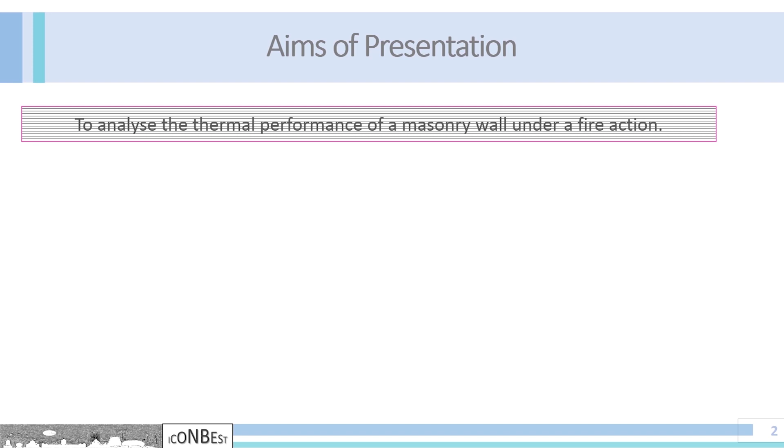Within this framework, the present investigation aims to analyze the thermal defensiveness of hollow clay brick masonry walls subjected to fire action, or exposed to elevated temperatures. The main objective of this study is to analyze the thermal performance of a masonry wall under a fire action that corresponds to the eminent standard temperature-time curve of fire as specified in the European standard, Eurocode 1. Temperature variations on the non-exposed surface of assumed masonry walls, revealing their thermal responsivity and self-defensiveness, can be determined by adapting a 3D model and an eminent dynamic thermal simulation program.

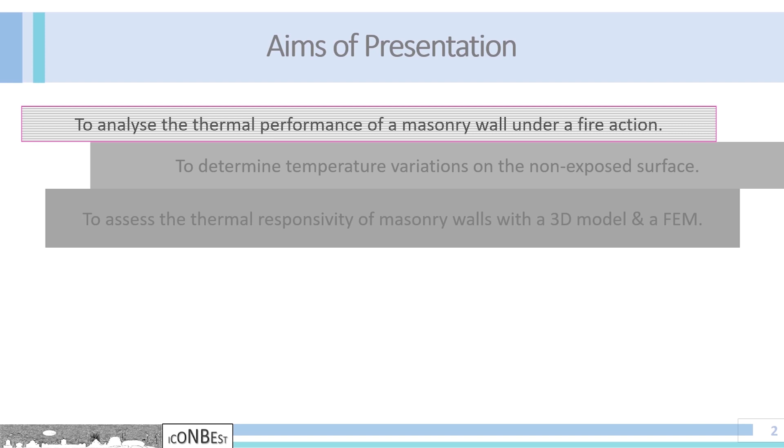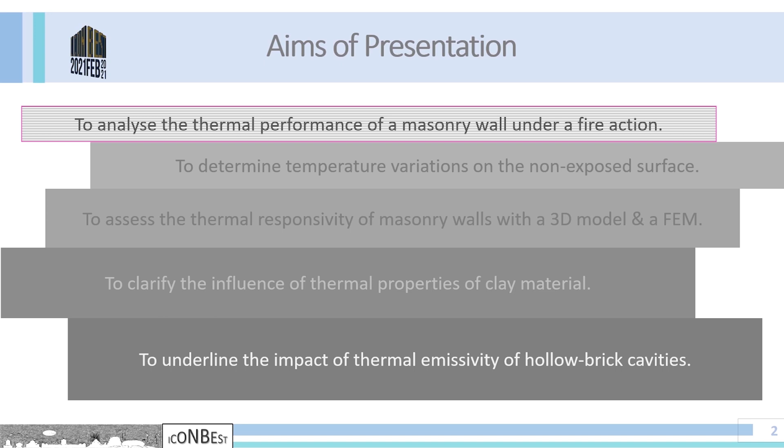This work shows the significance of the thermophysical properties of clay material and the importance of thermal emissivity as regards heat transfer processes for examined assemblies. Apart from this, a few slides regarding the thermal behavior of insulated wall configurations are exposed to highlight the influential role of the insulation layer on the heat flux and the corresponding temperature variation in the time domain.

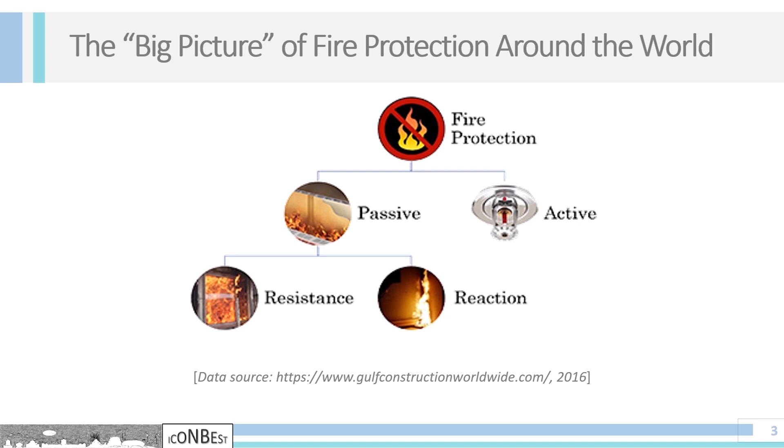It is essential to point out that fire protection shows an immense interest on a global scale. Severe consequences of fire incidents and accidents address the demand to enhance the design of building shells. In order to mitigate this impact, passive as well as active measures demonstrate an efficient way to fulfill this critical demand. Regarding passive approaches, the resistance and reaction of building materials, building elements and building structures underline some of the key issues of this problem. To address these points, mostly national fire regulations specify prescriptive necessities based on the shown experience.

Passive fire protection concerns fire and smoke prevention measures, such as the design of the building and the compilation of structure elements on the basis of building materials arrangement. On the other hand, active fire protection focuses on fire and smoke control measures. These are fire and smoke detection systems, fire suppression systems, portable automatic fire extinguishers, and at last, smoke extraction systems that are regulated by naturally or forced control ventilation schemes.

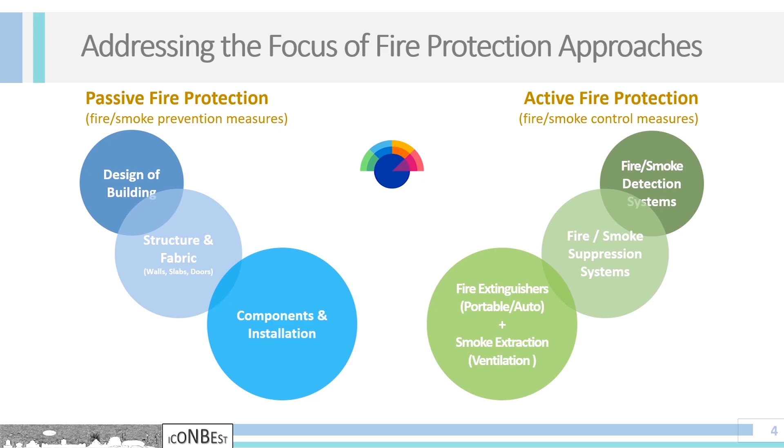With respect to smoke extraction systems, it is essential to point out that they can ameliorate sharply the performance-based design of buildings and facilitate the evacuation process. Since the core attention of this investigation refers to passive fire protection of buildings, it is important to state that the installation of building components is critical.

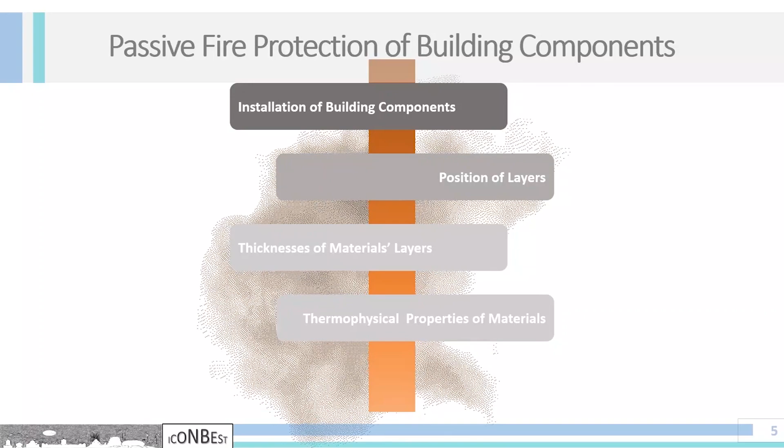Accordingly, the position of building layers, in addition to the geometrical characteristics and thermophysical properties of building materials, can modify and shift substantially heat fluxes and temperature fluctuations. This implies also the exposed temperature peaks, which is a central issue of this presentation.

In the literature, someone can notice that the thermal response of masonry walls strongly relies on the assembly of involved materials. Moreover, in many studies, the thermal properties of clay material are shown to be influential in terms of heat flow through the masonry. In other papers, the importance of air cavities within clay hollow bricks is clarified with respect to the thermal emissivity of involved surfaces. So, as seen, a special consideration is given to thermal processes through masonry walls.

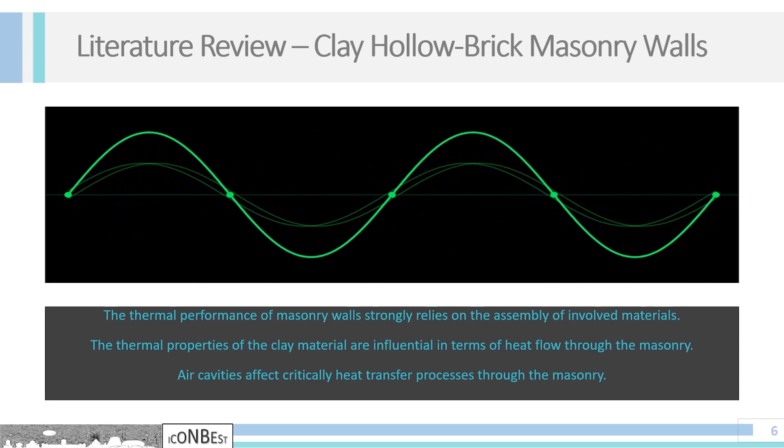This persistent dedication makes obvious the stress of this study in order to further clarify the gray zones that still remain. Moving forward, masonry walls and building materials are illustrated in the following slides.

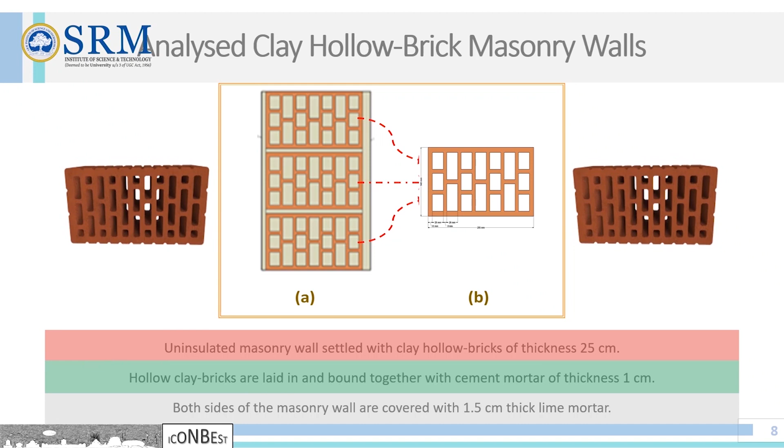As can be seen here, the analyzed building assemblies correspond to uninsulated masonry walls. A masonry wall consists of conventional hollow clay bricks which are laid in and bound together with cement mortar. The thickness of each clay brick unit of a masonry wall is 25 cm, while the thickness of the bond between bricks and mortar is considered to be 1 cm. In addition, both sides of a brick wall are covered with 1.5 cm thick lime mortar.

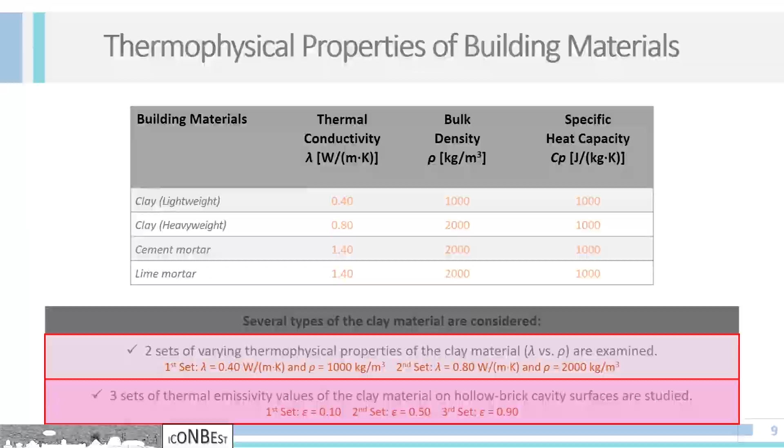The thermophysical properties of the clay material of brick units, of the brick bonding, and of both coatings are listed in the current table. Furthermore, with reference to hollow blocks, two different types of clay material are examined, referring to lightweight and heavyweight categories. Then again, three sets of thermal emissivity values of the clay material on hollow brick cavity surfaces are considered for the aims of this examination. These values cover, from one side to another, the entire possible range of emissivity variations in the production stage of building materials.

Consequently, the analyzed masonry wall scenarios are briefly stated in this table. As seen, six illustrative cases are analyzed. Based on these choices, our main goal is to extract findings that can clarify the general trends shown in analogous cases.

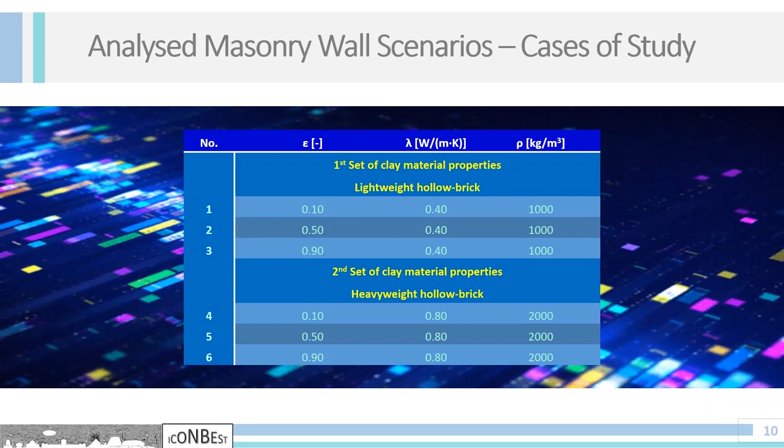As we move forward, the environmental conditions on both sides of the masonry wall should be cautiously selected and specified in order to conduct the transient thermal analysis. With respect to temperature variations on the exposed to the fire boundary, a logarithmic forcing function appears to be valid. This type of variation demonstrates the actual elevation of temperatures due to a fire action incident.

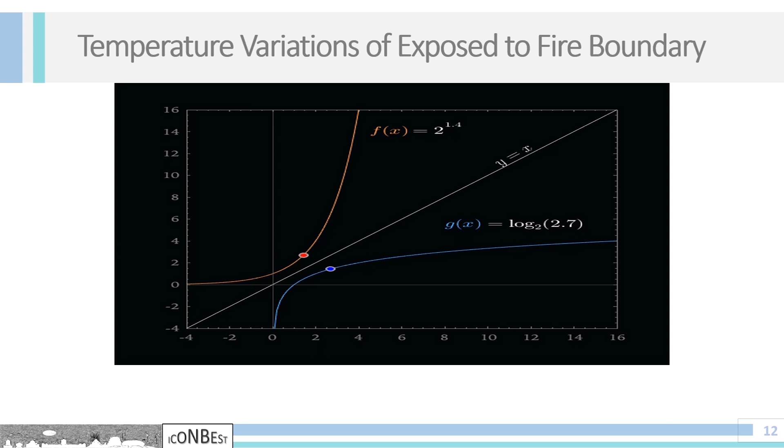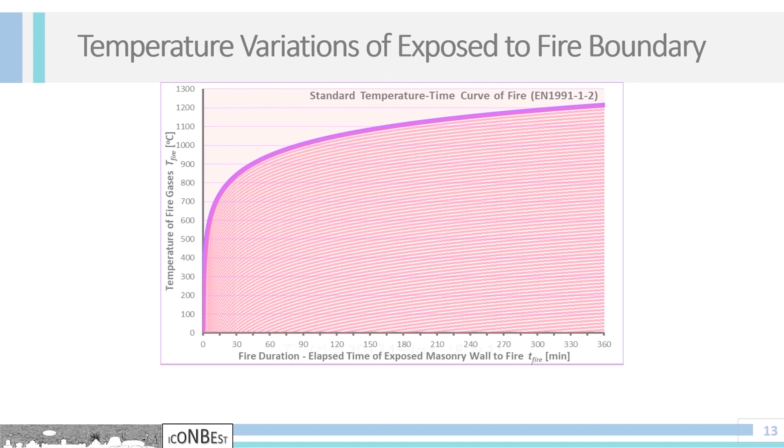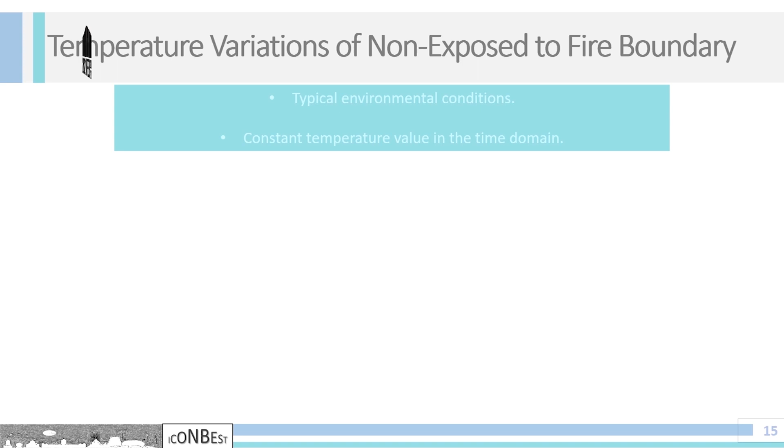Gas temperatures in the vicinity of a fire-exposed masonry wall can be replicated by adapting nominal temperature time curves according to Eurocode 1. This trend is elucidated by the standard temperature time curve of fire, with temperature variations aligned with the following equation. On the other hand, temperature values on the unexposed surface of a masonry wall against the fire action show a fixed trend, expressed by a constant air temperature value for the entire 6 hour period of the conducted transient thermal analysis.

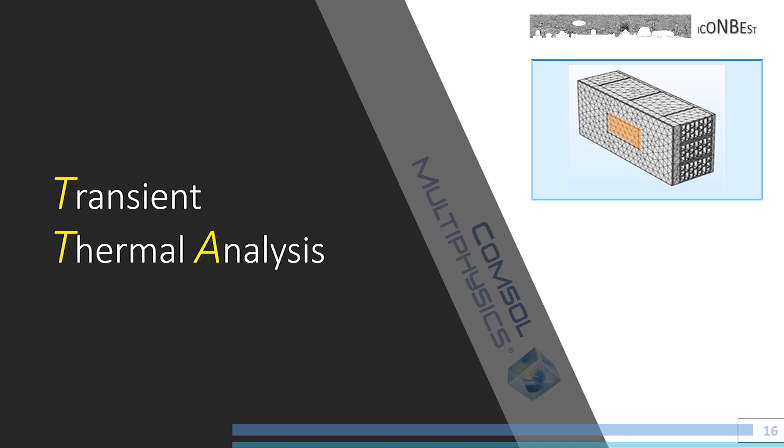At this stage, our main concern is to briefly illuminate the key aspects of the transient thermal analysis. This part addresses the simulation program as well as the model development for the fundamental objectives of this work. To accomplish this goal, a finite element methodology reflecting the main philosophy of the algorithm was taken into account. In this context, three-dimensional modeling is considered an adequate technique, as actual transverse heat flows are assessed due to their vital impact on the findings of this numerical work.

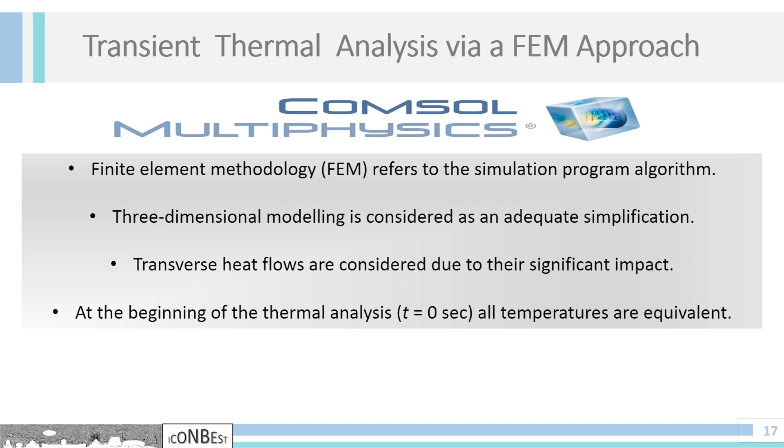To resolve heat transfer processes for building members, it is necessary to specify the geometry of its structure, the thermal and spectral properties of entailed building materials, and the forcing functions on both boundaries. The following equations demonstrate the theoretical background of this analysis. Overall, these equations account for conduction through solid wall sections of the assembly, free convection within air cavities developed by the brick hollows, long wave radiation on the cavity surface of brick elements, and finally convection and radiation on both boundaries, while assuming some basic simplifications that do not disturb the reliability and accuracy of the heat flow evolution.

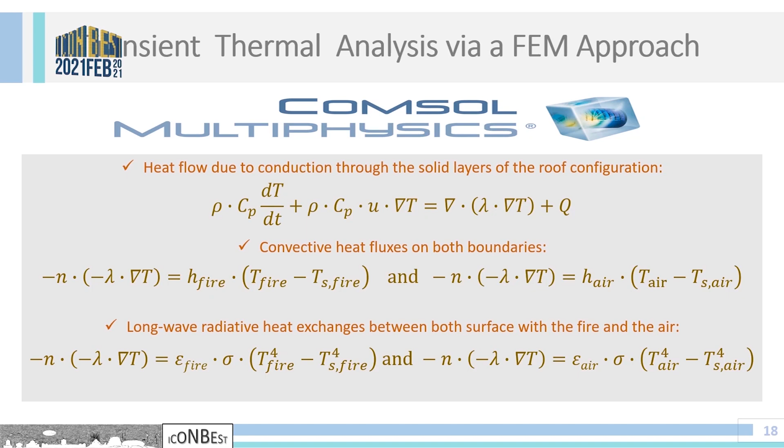As we proceed to the core sections of this study, simulation software findings showing the impact of the previously mentioned parameters on the temperature evolution of masonry walls subjected to fire are given in the following parts of this presentation. As already mentioned, special focus is given to the indicated temperatures on the unexposed surface of the clay hollow brick masonry walls.

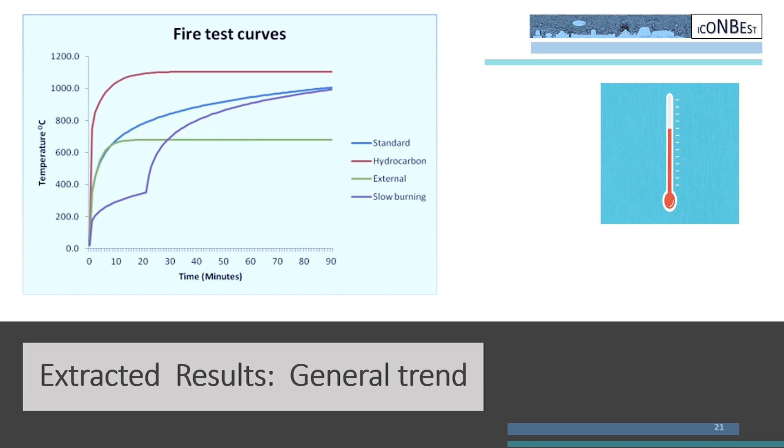In general terms, the extracted results of this effort in the time domain unveil a gradual increase of the developed temperatures. This is a rational outcome since the fire action presents an elevated logarithmic trend. Therefore, based on this forcing function, someone could say the only way for the shown temperatures is upwards.

As shown in this graph, an increase of the thermal emissivity leads to a parallel increase of the resultant temperature of the non-exposed surface. For lightweight masonry walls subjected to fire, the maximum surface temperatures are as follows: for an emissivity equal to 0.1, the maximum temperature reaches 185 degrees; for an emissivity equal to 0.5, the maximum temperature is 220 degrees; while for an emissivity of 0.9, the temperature is 235 degrees. It is worth noting that as the value of thermal emissivity rises, its effect on the temperature values weakens. Moreover, the rate of temperature increase declines as it asymptotically approaches a constant value.

From the graphs in this slide, it can be observed that variations in clay material properties affect the thermal response of heavyweight masonry walls in a similar fashion. For this case, the corresponding temperature values of the non-exposed surface are as follows: for an emissivity of 0.1, a maximum temperature of 180 degrees; for an emissivity of 0.5, 240 degrees; and finally for an emissivity of 0.9, a maximum temperature approximately equal to 265 degrees.

It becomes apparent that the thermal behavior of a masonry wall sharply relies on the thermal emissivity of the clay material. This implies that the thermal effectiveness of low emissivity coatings is essential with respect to moderated heat fluxes through the geometry of the masonry wall. Therefore, brick units integrated with low-E coatings are less prone to the engaged fire exposure.

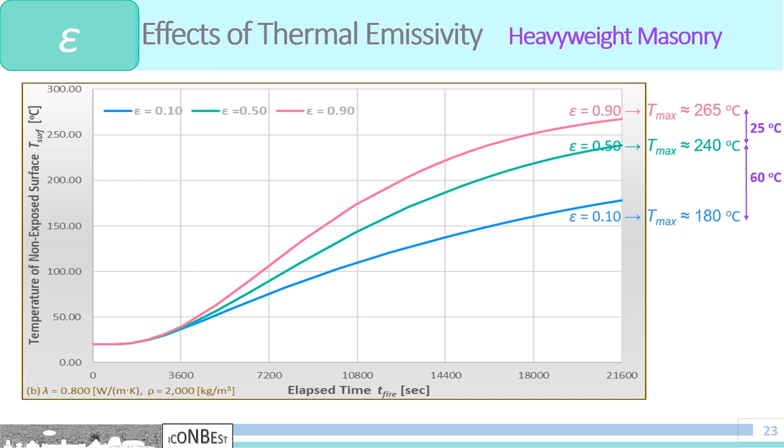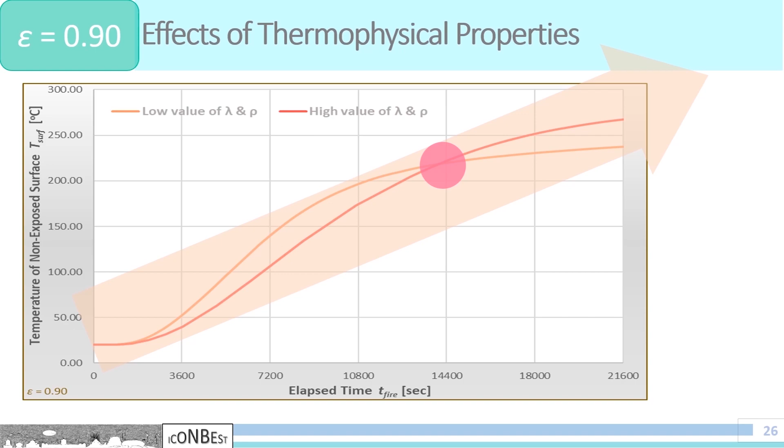However, there are several additional aspects that can tremendously modify heat transfer processes through masonry walls and building layouts. Such principal issues capable of radically revising the previous shown trends are the presence of a thermal insulation layer, the flammability of the insulation subjected to elevated temperatures, and the position and allocation of the insulation with respect to the masonry outline. Based on these points, the insulation layer can support or not the self-defensiveness of building components exposed to a fire action.

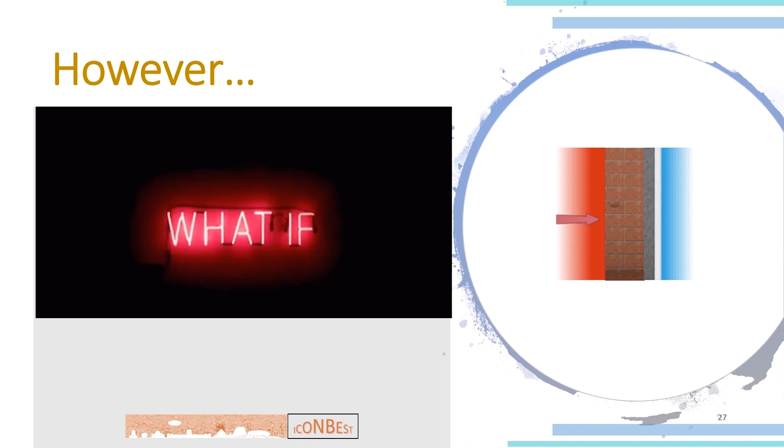Yet, this is another long story that I may have the pleasure to present on another occasion. As seen to the right side of the slide, a general outline of the examined insulated masonry wall is delineated, along with the discretization of this component using the mentioned simulation tool. Evidently, the procedure appears similar to that presented previously, while an additional layer is incorporated to assess the effect of the insulation layer.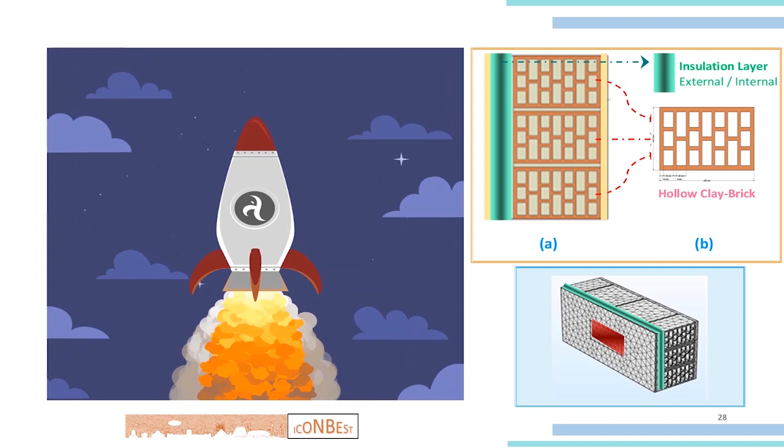To be more precise, the flammable material is stable until approximately 100 degrees, but after that enters a glass transition phase, and above 110 degrees undergoes rapid thermal degradation. The inflated EPS beads lose their volume and at 150 degrees regain their initial diameter. At 160 degrees, the EPS appears to be in a viscous liquid state and can no longer be categorized as a solid insulating board.

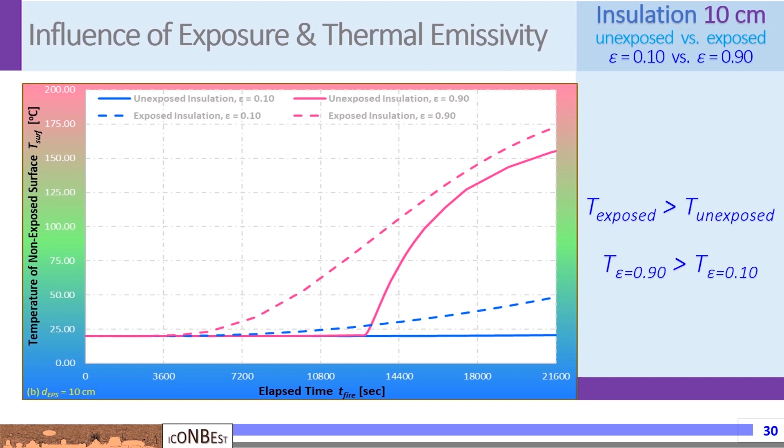Moreover, in this slide, one can notice that increasing the thickness of the thermal insulation layer from 5 to 10 centimeters does not notably affect the trend of the presented temperature variations at the backside of the wall. Consequently, the melting process stage of the insulation layer leads to only a minor delay of the shown temperature fluctuations. Nevertheless, the influence of the thickness of the thermal insulation layer will be prominent for a non-flammable material such as a common rock wool layer.

To conclude, the selection of materials' thermal properties plays a significant role regarding the temperature evolution through building components. Neglecting these aspects may cause severe consequences and repercussions in terms of fire behavior. The effect of thermal emissivity is vital and accounts for the majority of present masonry configurations. High emissivity results in an important heat bridge that accelerates the heat wave progress towards the unexposed side. On the other hand, decreasing the emissivity will introduce a secondary heat resistance within the brick unit. Finally, rising gas temperature values rely on the density of the clay material.

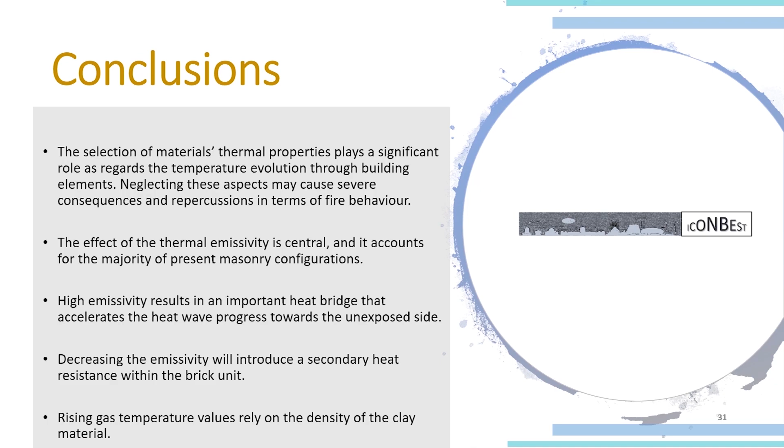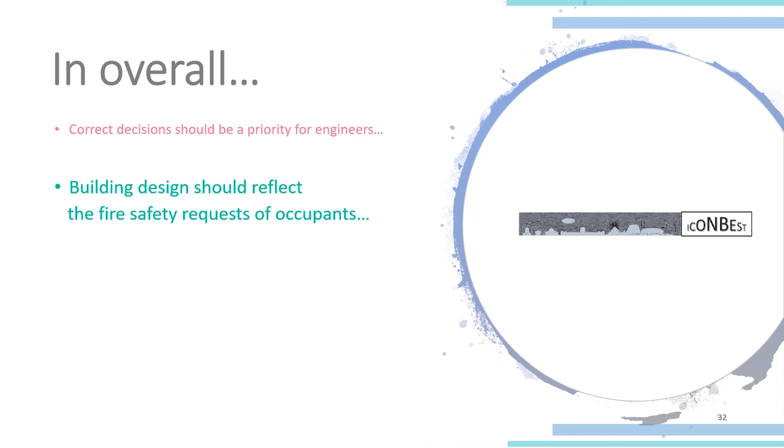So, as is clear, correct decisions should be a priority for engineers. Moreover, building design should reflect the fire safety requests of occupants, and finally, our dedication to fire protection decisively affects the fire safety needs. This aspect depends vigorously on the understanding of the basic principles of nature's processes.

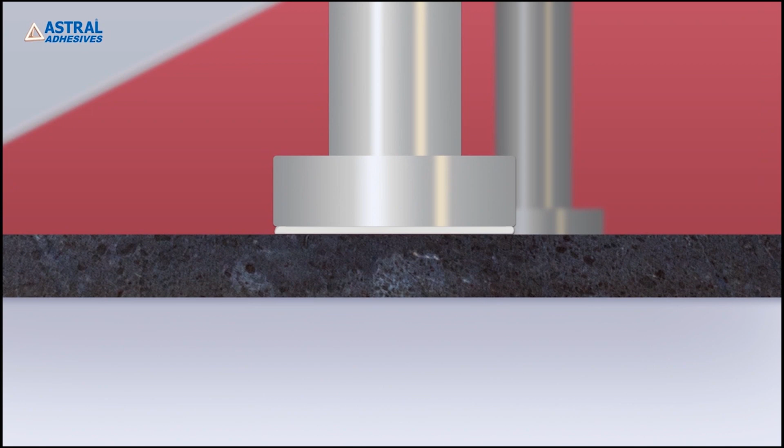Epoxy adhesives are widely used in the industry because of their high strength, chemical resistance, and the ability to adhere to different surfaces. But almost all of them have low impact strength and low UV resistance, which makes them weak after long-term use, under stress and limitations.

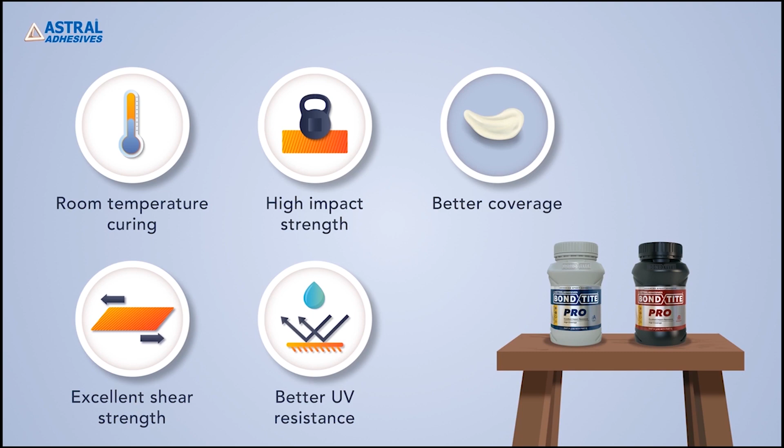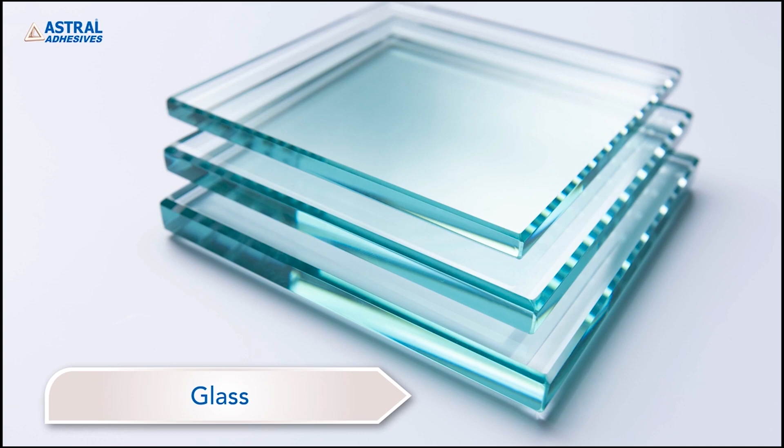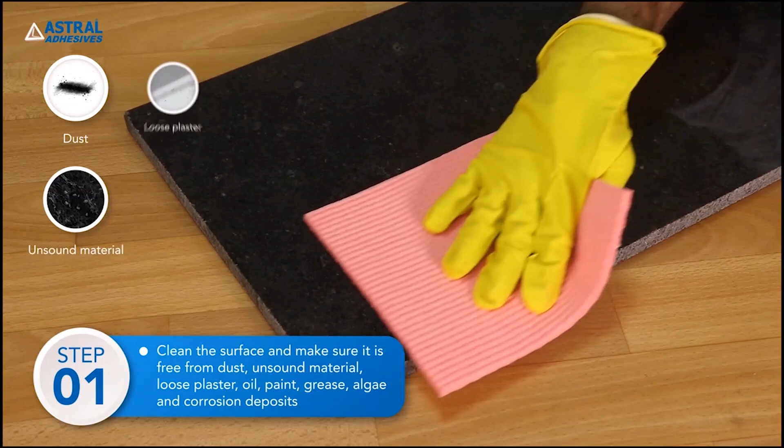Bond Tite Pro is very easy to use. The directions to use are really simple. Step 1: Clean the surface and make sure it is free of dust, unsound material, loose plaster, oil, paint, grease, algae, and corrosion deposits.

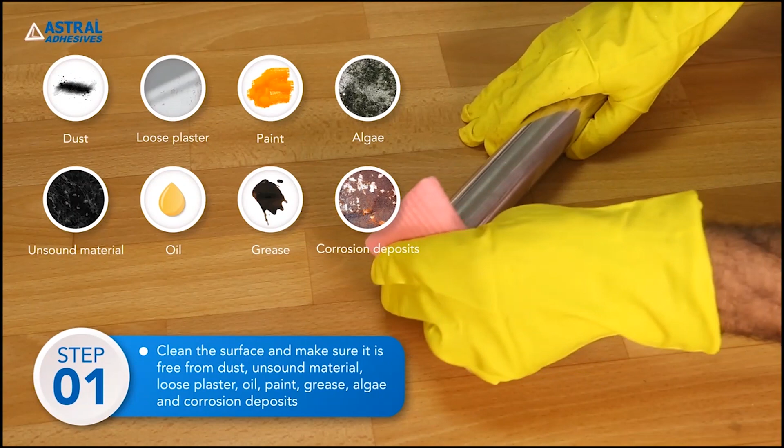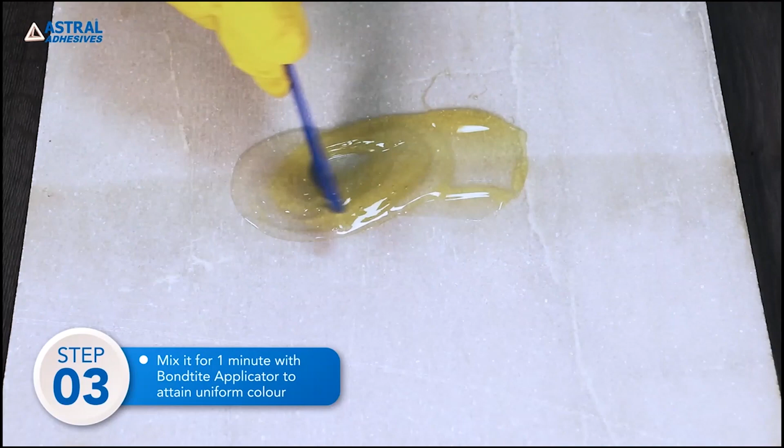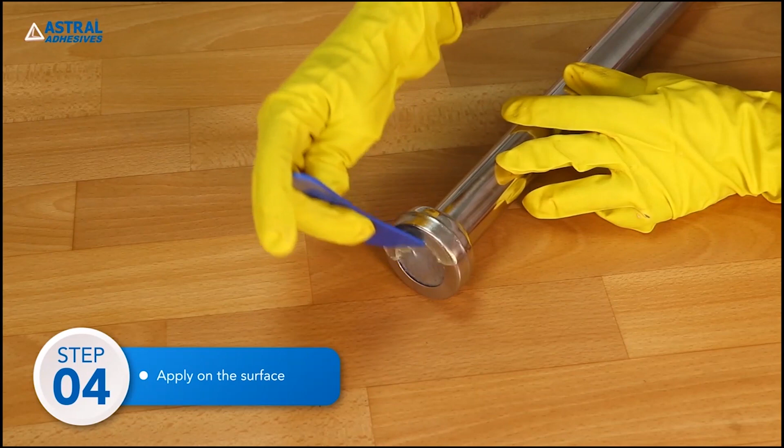Step 2: Take an equal quantity of Part A and Part B. Step 3: Mix it for 1 minute with the help of the Bondtite applicator to attain a uniform color. Step 4: Apply on the surface. Step 5: Clamp or support the surface for 4 hours.